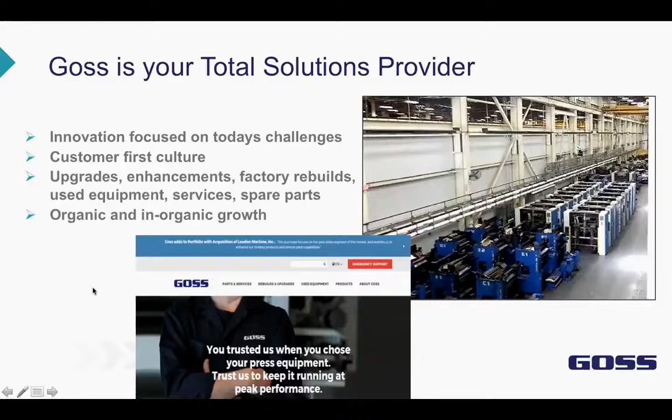The Goss webinar series is put together to provide information on targeted enhancements to improve your printing process. These targeted improvements impact the bottom line in a way that helps printers to be more cost effective and more competitive.

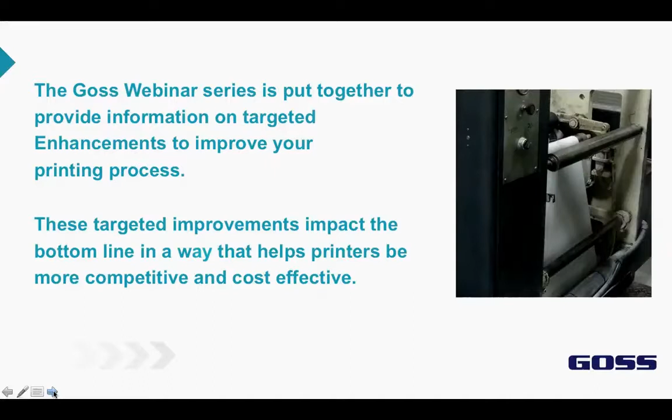First question. A lot of words get thrown around. What's an enhancement? By our standards, an enhancement provides waste reduction and cost savings. That's number one. You've got to save money, make your process more competitive. Number two, performance improvement. We got to make it better than it was when it shipped out the door.

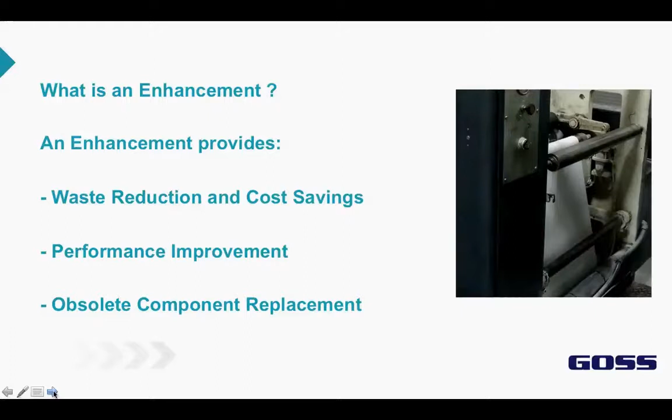Number three, obsolete component replacement. If you have obsolete components, it affects your performance, it affects your waste. We got to get those things out of the equipment. Today's webinar focuses on the enhancements for the T23 Infeed and HCR chills that achieve these benefits.

Now, when we're talking about T23 Infeed and HCR chill rolls, Goss over the years has acquired several different companies. Of them, Harris Graphics, Heidelberg Harris, and then Goss International as it stands today. So a lot of things we're talking about relate to those presses.

On a side note, the technology developed for this enhancement lends itself to infeeds and chills on several non-Goss pieces of equipment. MEGTEC and QuadTech both are third-party vendors who manufactured chills and infeeds, and we have adapted chill and infeed retrofits for third-party equipment, including Meg, Quad, and several different manufacturers of presses.

So don't be shy or don't think that, well, I have other equipment that this won't account for. Let us know if you have an infeed and a chill on your press. We can look it over and see what we can do about upgrading your infeed and chill.

Let's talk about benefits. Everything has to have a benefit if you want to do it. If you don't have a benefit, you don't want to spend your money on it. So the first benefit, number one, paramount to all, you have to reduce waste and save cost. This infeed and chill upgrade utilizes modern AC technology to control the infeed and chill. This technology allows better web control, which directly affects make ready and run waste.

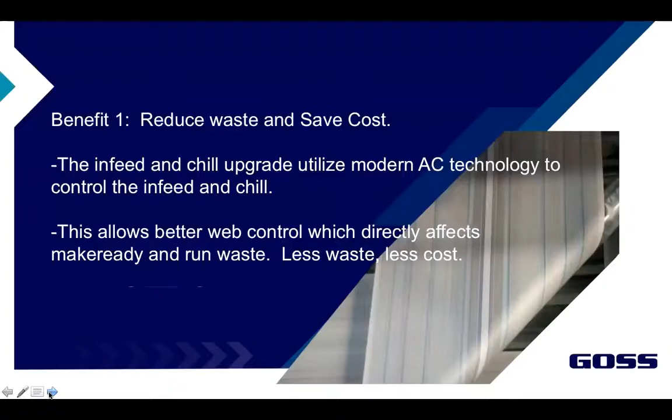By regulating tension at slower speeds, you're able to get register and color on quicker, putting you on the good counter quicker. The quicker you're on the good counter, the more labor, paper, and consumables you're saving. Also, better tension control means less web breaks. Less web breaks, to anybody in the printing business, saves paper, manpower, and consumable costs and unexpected delays.

The upgrade also uses modern, commercially available components which are easy to replace and source. AC drive motors have a longer maintenance-free life as opposed to the existing DC motors. Less maintenance cost, less parts cost.

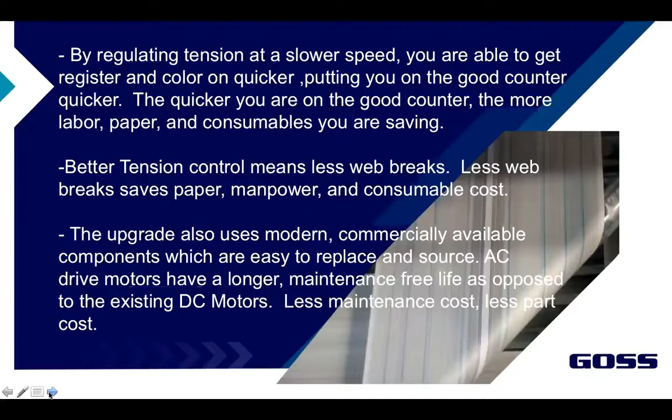And in today's world, maintenance personnel are hard to come by to work on older equipment. So as we put newer technology in older equipment, it makes it so that your newer maintenance personnel are more adept at fixing problems quicker and cheaper.

The second benefit, performance improvement. And using the AC drive technology on this thing, the Infeed and Chill are able to regulate from 0 speed up to max speed, whereas the original system had very little control at slow speeds. This allows tension control at slower speeds and throughout the speed range.

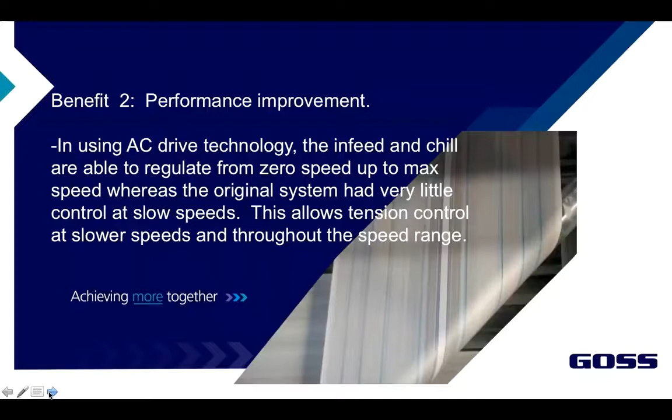The existing chill motor that's on the chills today in the field is unable to regulate until 10% press speed. This retrofit system starts regulating at continuous run. And I'll digress here for just a second.

If you're running any type of inline finishing, rotary cutters, stuff like that, they pull on the web very hard. And if your chills can't adapt to it, your old chill rolls, you're always fighting tension while you're accelerating presses with inline and that type of equipment on the end of it.

So going to a modern AC drive chill roll allows you to actually pull up and push as much paper as you want past the dryer towards the inline finishing so that you don't have web breaks while you're accelerating running that specific type of post-press equipment.

Also, when you can regulate tension closer, you can run lighter and different stock paper. That's a big problem, lighter stock papers, to a lot of customers, because when you go to a lighter stock paper to save cost, customer requirements, whatever reason it is, you can't maintain tension because you have to crank the tension up. And when you crank the tension up, you break the web.

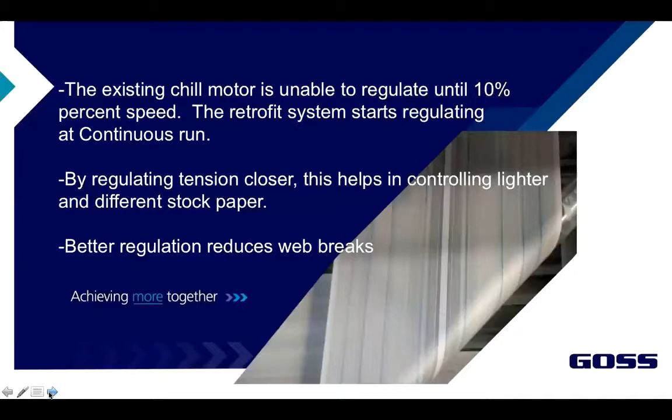So the capability to handle lighter stocks through finer and more linear web control is a great benefit for your tension system and your press. And again, a performance factor is better regulation. It reduces web breaks. That's huge.

Third benefit, obsolete part replacement. The original Infeed and Chill control system was designed as an analog, discrete, custom component system. This enhancement is put together using modern AC drive technology.

The Infeed and Chill on the legacy equipment we're talking about, Harris, Cottrell, Harris, you go way back, was developed almost 50 years ago. And it's been the benchmark through the commercial publication businesses and insert for Infeed and Chill control. It's changed very little over the years.

Goss, Heidelberg, Harris, they've changed components to keep up as components became obsolete. But really, the system is very similar to what it was 50 years ago. It's time for a change, and with modern AC drive technology, now is the time. Also, this technology allows easier access to commercially available parts and sensors.

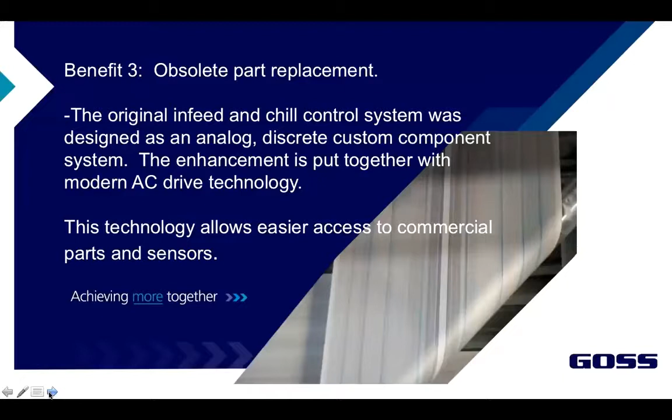So, in order to accomplish these three benefits, we need to have an understanding of what the Infeed and Chill do and how they do it. So we're going to spend a couple of minutes here going through what an Infeed and Chill do for the layperson. If there's pressmen on the line, it'll be something they already know. But for the layperson, we'll go through quick what an Infeed and Chill do and how important they really are to the printing process.

What is the purpose of an Infeed and a Chill? An Infeed provides a closed-loop means of maintaining and creating web tension on a press. You literally dial an amount of tension in to an Infeed. On the old Infeeds, you dialed it in via a pressure regulator with your hand. And the Infeed itself maintained that pressure.

The newest Infeeds have a digital display on them that you dial the pressure in with. Regardless of vintage, you're dialing in a pressure, and the infeed is maintaining that pressure. The chill roll is the next tension control device in the press after the infeed that creates web tension.

Think of it this way. If you're in a tug of war with a rope, one set of people on the left is the infeed, the people on the right are the chill roll. The infeed controls the amount of tension on that rope so that you keep the marker in the middle of the rope right over the mud hole so nobody gets pulled in the mud. So on a press, there is a game of tug of war going on, and you need both sides to pull exactly the same so that nobody ends up in the pit.

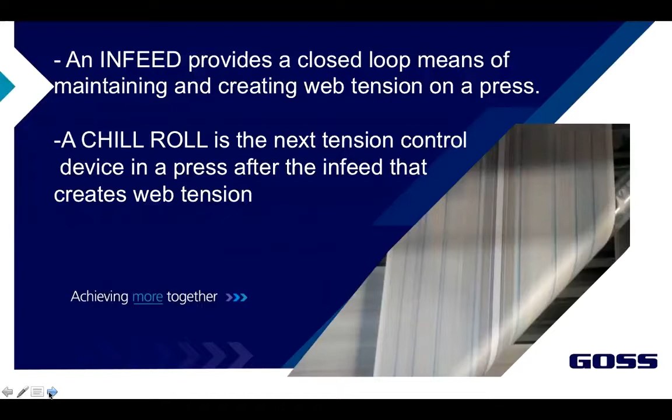Now, the infeed and chill that we're talking about utilize a harmonic drive, a trim motor, and speed control electronics. How, through the things we've talked about, does the infeed and chill create and maintain that tension?

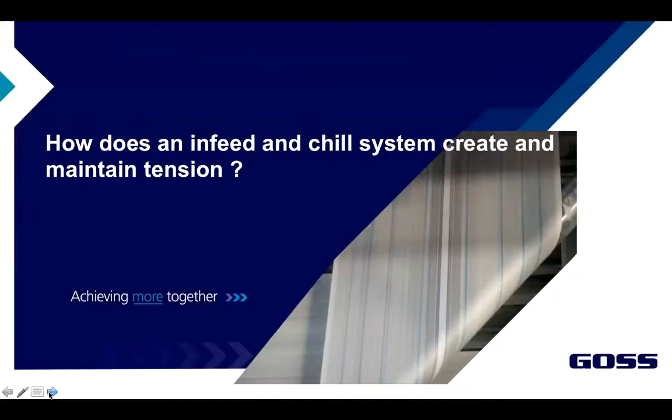An infeed is a driven roll that runs slightly faster or slower than the bearer speed of the press, which in turn increases or decreases web tension because you're either pulling harder or not quite as hard. The rolls on a chill run slightly faster or slower than the bearer speed of the press, which in turn increases or decreases web tension.

A properly operating infeed and chill will maintain a preset value of tension on the press. Proper tension is needed to maintain consistent register, color, and minimize web breaks. By the way, in here we've said register, color, also cutoff of your folder.

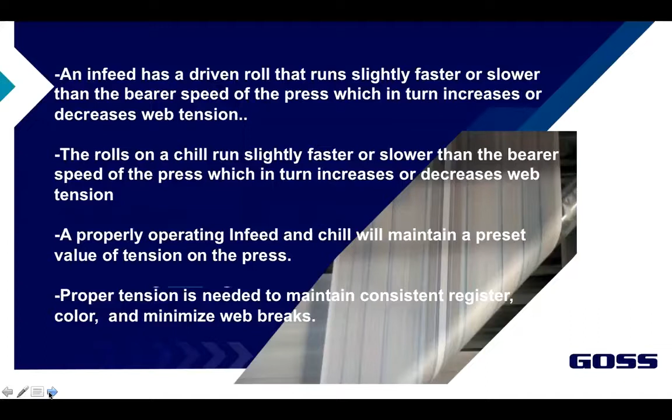The model of the infeed that came out from Harris way back when was called the T23. Over the years there's different acronyms after the T23, but basically a T23 infeed and an HCR chill is what we're talking about here for some of the more specific items. But remember, we can adapt this to several different models of chills that are not Harris or Goss legacy infeeds or chills.

So an infeed and chill use a trim motor, a harmonic drive, a driven roll, a nip roll, a dancer roll on the infeed, or some people call it a floating roller, a Bellofram, that's on the infeed, and a dancer position sensor, or the strain gauge, and that's on the infeed only. These are the major components on infeeds and chills.

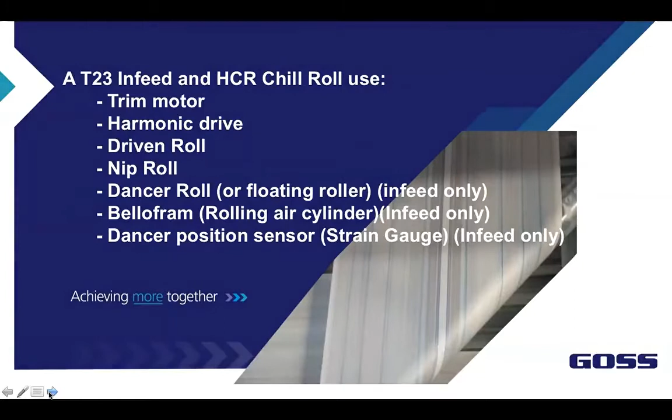What I'm showing you here is a picture of a two-web infeed or chill electronic enclosure. They're almost identical when you open the door and look at them, infeed or chill. If you look on the left-hand side, there's the preamplifier cards. They have little LEDs on them, or the older ones did not have LEDs. They had a line of pots along the edge of those PC boards.

Those big blue things on the bottom are capacitors. They're hooked to very large high-power linear power supplies. Also, up top, those are called the heat sink boards. Those are power amplifiers. They use transistors and such to actually drive the trim motor.

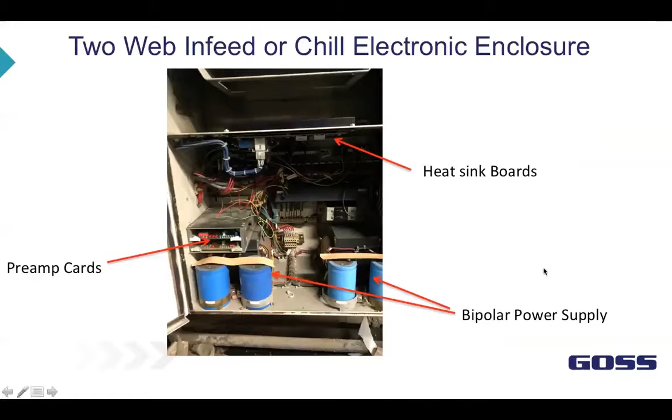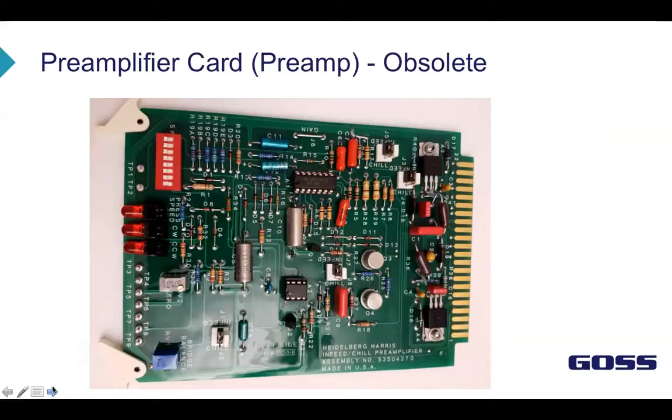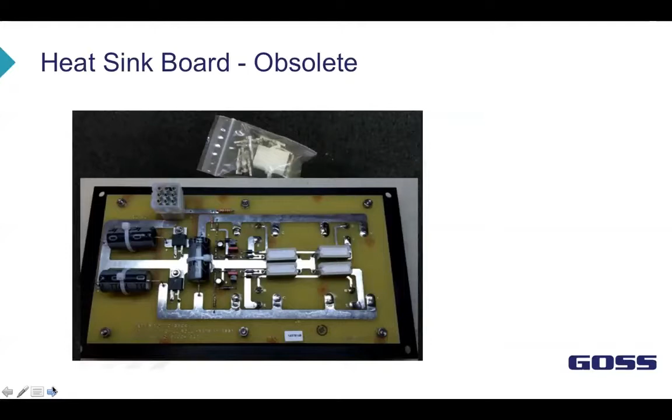And you'll see on each of these slides it says obsolete, obsolete, obsolete. Goss still has residual stock of these parts, but those residual stock parts are not infinite. The manufacturers that make the components just no longer do it. So as these parts go away, you can no longer get the parts.

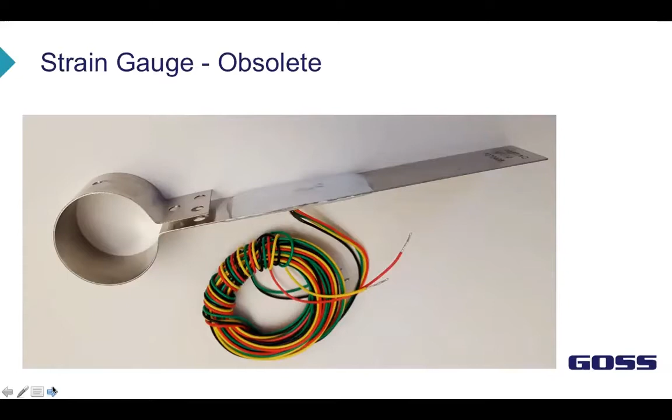Okay, what's the most common electrical failure or maintenance items on an infeed or a chill? Well, the preamp cards, the heatsink cards, the DC motor, which is also called the trim motor, or the motor tach. The motor tach is a more common failure than the actual motor, but the motor tach is mounted on the motor, so several times they're both changed. And the strain gauge. The infeed actually has a strain gauge where the chill does not.

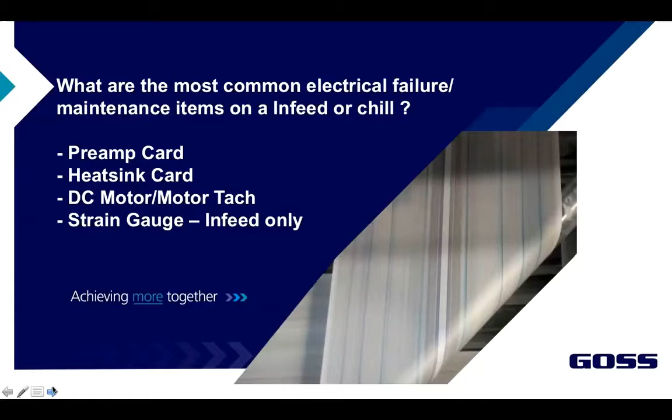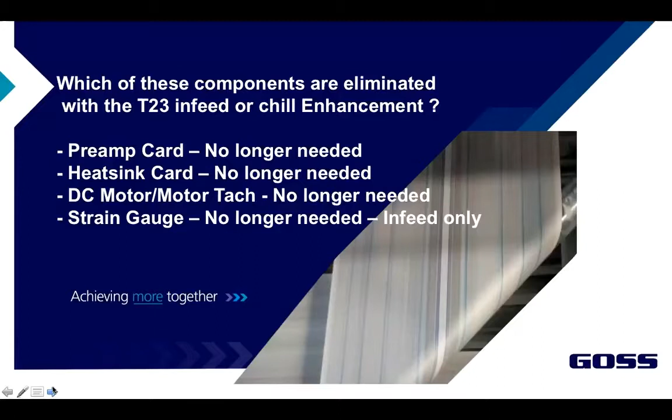Which of these components are eliminated with this infeed and chill enhancement? Well, we get rid of the preamp card. We get rid of the heatsink card. We get rid of that DC motor and DC motor tach. And we get rid of the strain gauge.

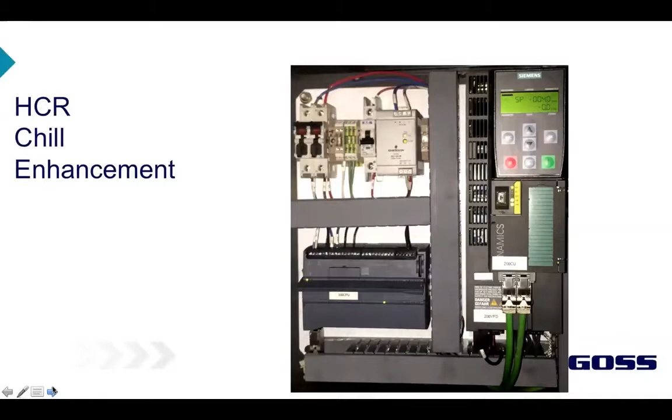Okay, what's included in the enhancement? You get an AC sensorless vector drive system that eliminates, like we talked about, the preamp, heatsink, and the power supplies. You get a high-resolution AC motor that replaces a DC trim motor, and it eliminates the motor tach. This system is a sensorless vector system, which means it does not require a tach. Another failure item that goes away.

We also use a non-contact position sensor to eliminate the strain gauge. This is a device that does not turn or rotate or anything. It's non-contact. So everything that moves, rotates, or twists is always a failure item. We've eliminated that failure point. And on the chill roll, we mount a touchscreen on the console to increase or decrease and also monitor some of the conditions of the drive actually on the console itself.

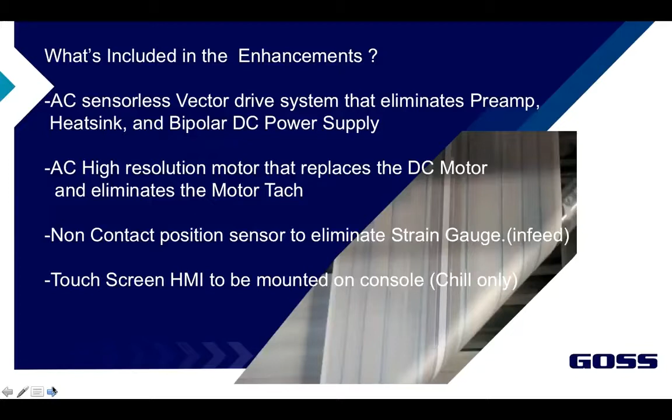There's other benefits to the new system. You get to put this stuff on there and leave the same mechanical system in the chill and the infeed. You get to leave the same pneumatic system on the chill and the infeed. And you continue to use the same harmonic drive system in the infeed and the chill.

Along the lines of the same mechanical harmonic system, we have commitments from vendors that the mechanical harmonic system is not obsolete. So the harmonic inside the infeed and the chill is a modern product, even though it has been around for pushing 50 years now. It's been new metallurgy, new technology, but for all intents and purposes, you can replace the harmonic system, the bearing, the can, everything associated with it. Goss can provide all the parts for it, and there isn't an issue in sourcing parts for that.

Another good benefit is the system is designed so you have commonality of parts between the infeed and chill. These systems look very close. Big difference on the chill side, there's a little PLC on it to communicate with a touchscreen on the console and adapt speed reference signals. It's not required on infeed. Other than that, very similar.

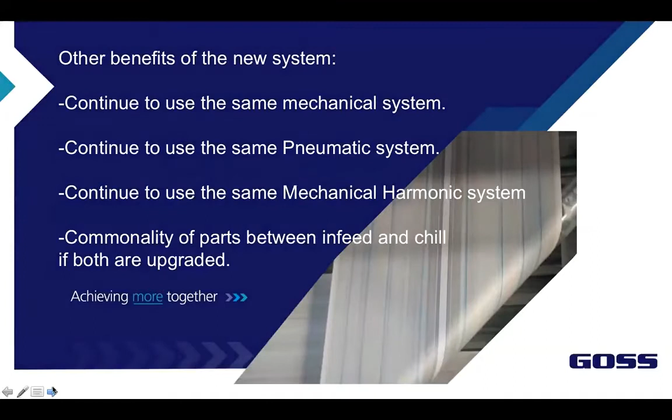What we have here, this is actually the white paper or the flyer that gets sent out if somebody requests the enhancement for the infeed and chill roll. Okay, this has been sent out by Goss. But don't fret if you do not have a Goss system, because we can adapt this system to several infeeds. If you take, for all intents and purposes, a shafted Harris Graphics, Heidelberg Harris, or Goss press that has an infeed and a chill on it, there is a good possibility this is a drop-in retrofit for it.